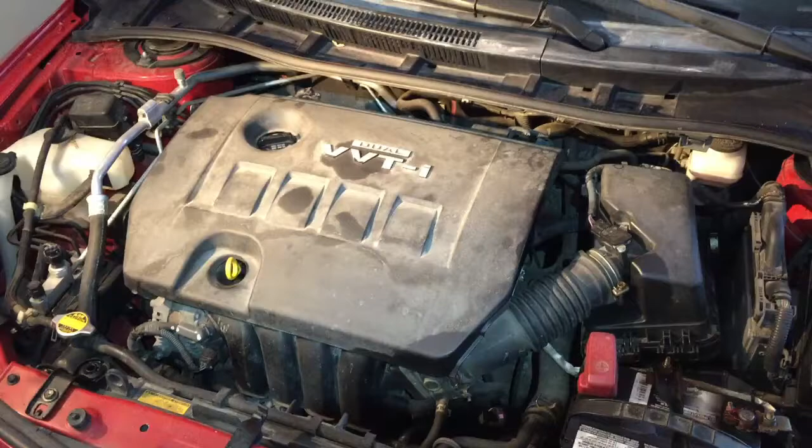Today we're going to change the spark plugs on a 2009 Toyota Corolla. It's a 2ZR-FE 1.8 liter inline 4-cylinder Toyota engine. It's dual VVTi, as you can see, and we're going to change the spark plugs on this engine.

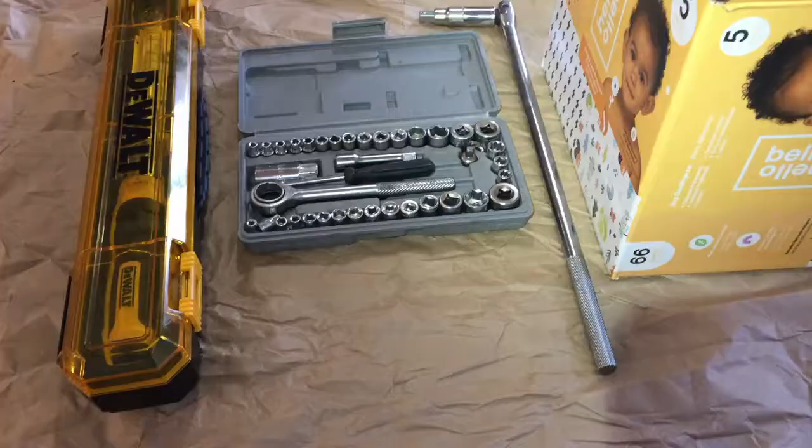First let's check what we need for our spark plug change. We will need a torque wrench if you want to torque the spark plugs to spec. Otherwise, you can just torque them until snug, and there are other methods people describe on the internet, but I prefer using a torque wrench. Then you'll need a set of sockets, and you might need a long breaker bar. If your spark plugs are stuck, then you might need this. I hope I won't. Then we have some other stuff here.

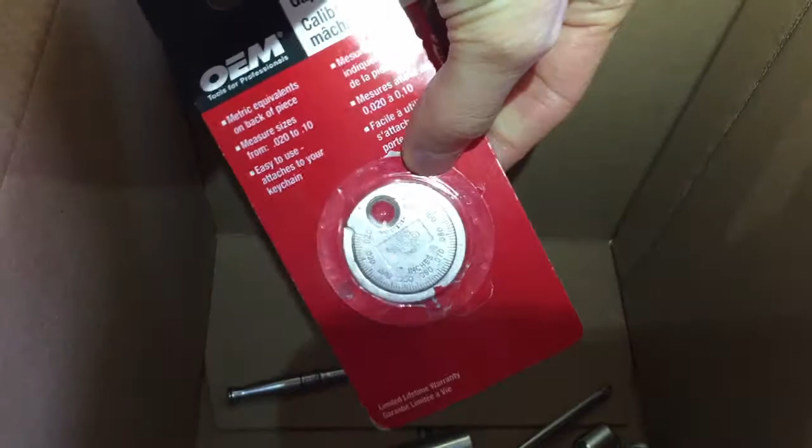Of course, our spark plugs. I bought these on Amazon, and they're not exactly the ones recommended in the manual, but we'll talk about that later. We'll need some dielectric grease, and you'll need to check the gap on your spark plugs, so you need this kind of gauge or some other kind you can find. You'll need a socket for your spark plugs and some other tools. I also like to use compressed air to blow away dirt around the spark plug, so when we put in the new spark plug, we don't bring that dirt into the cylinder or on the threads.

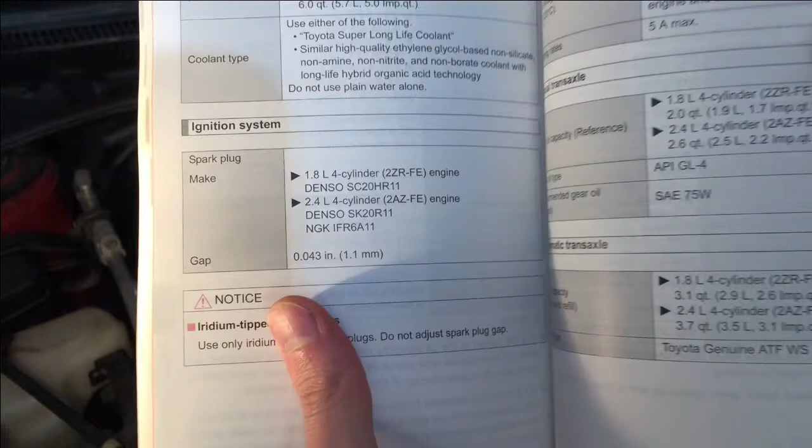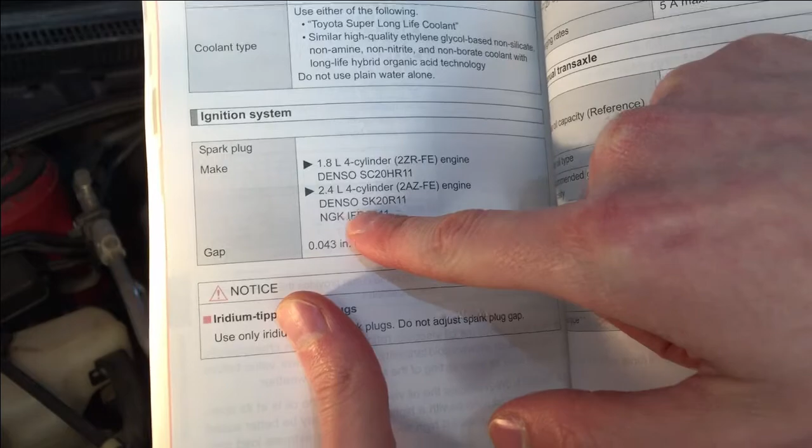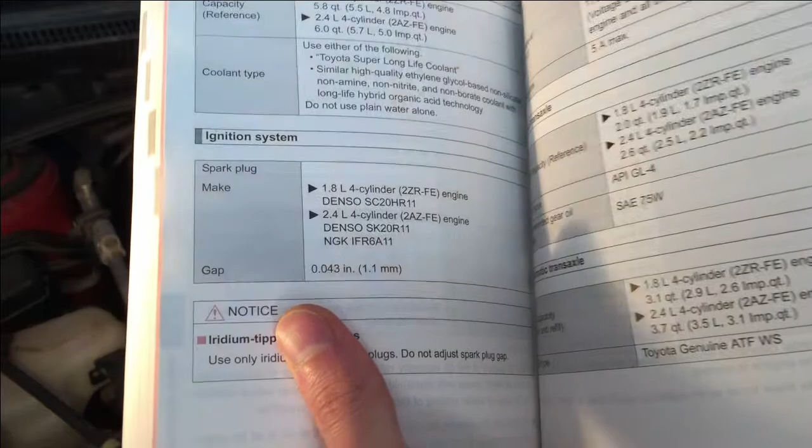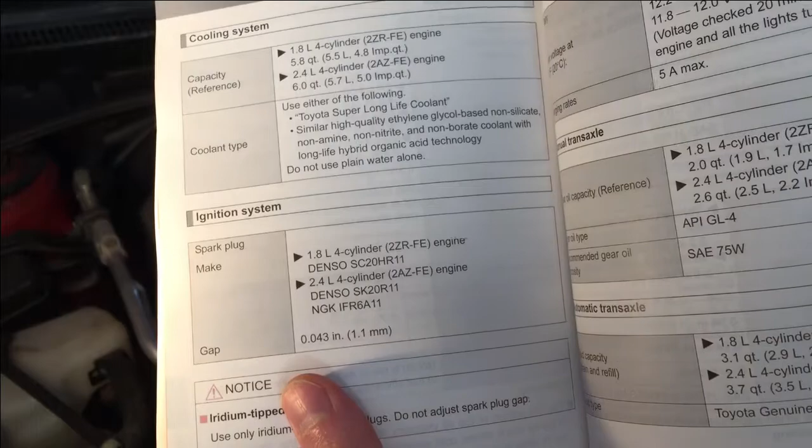Let's check what kind of spark plugs we need. For that, just open your owner's manual for the Toyota Corolla and check what kind of spark plugs you need. It says 1.8 liter 4-cylinder engine, 2ZR-FE, you need Denso with this number, and for the other engine you need Denso with this number or NGK. Of course there are a lot of aftermarket spark plugs, and I bought aftermarket ones. So you can try using the recommended Toyota ones, or you can go with aftermarket. It shouldn't really be a problem as long as the spark plugs are good quality.

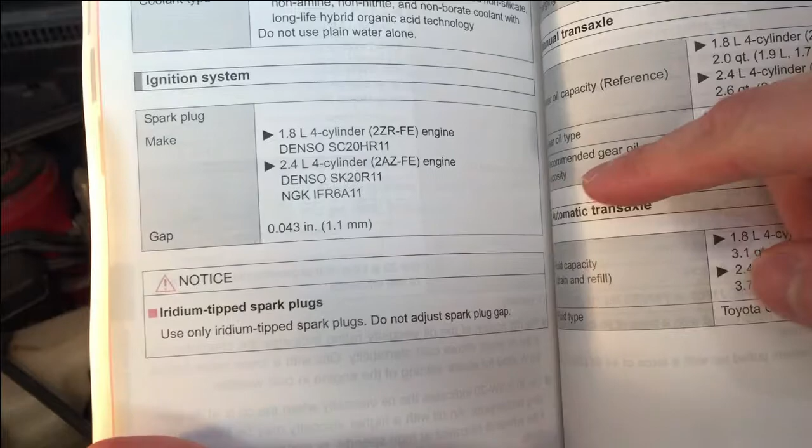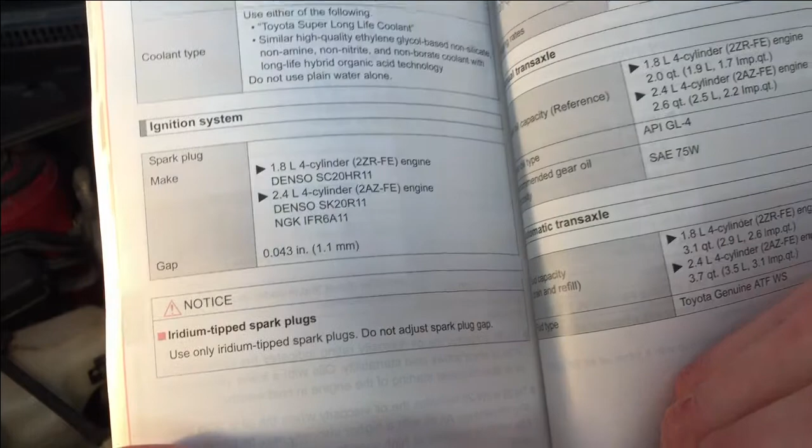Another thing you need to check in the manual is the gap. We need to make sure our gap is like this. It also says use only iridium tipped spark plugs and do not adjust spark plug gap. But I think this is a bit misleading, because sometimes from shipping you might get a slightly different gap because it was damaged, maybe hit during shipping. So you will need to adjust the spark plug gap sometimes, or at least it's a good idea to check them, and if the gap isn't correct, maybe bring them back to the shop where you got them.

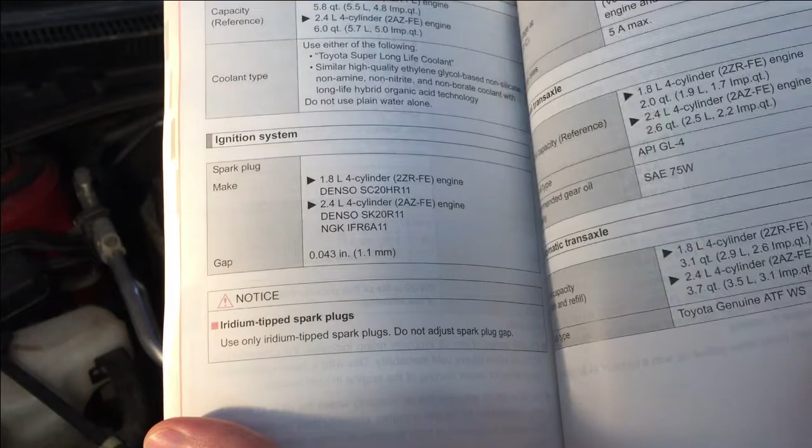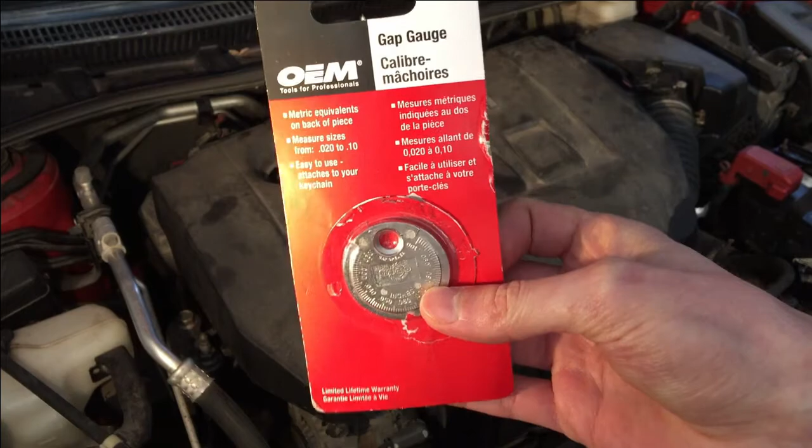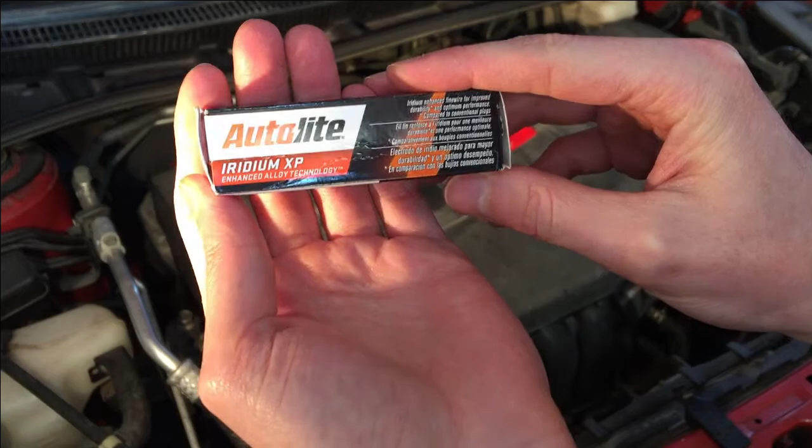As I said, I bought aftermarket spark plugs, and I'm going to check the gap using this coin style gap gauge. We know we need 1.1 millimeter on our spark plugs, and these are the Autolite Iridium XP spark plugs. So we're going to check that it's 1.1 millimeter, preferably on all of your spark plugs.

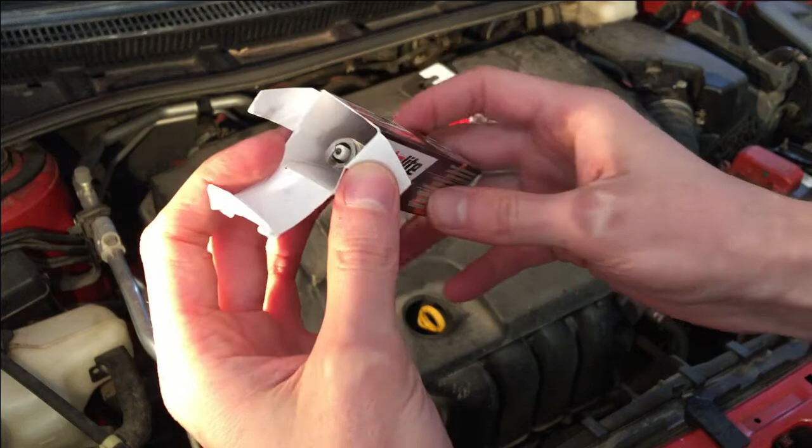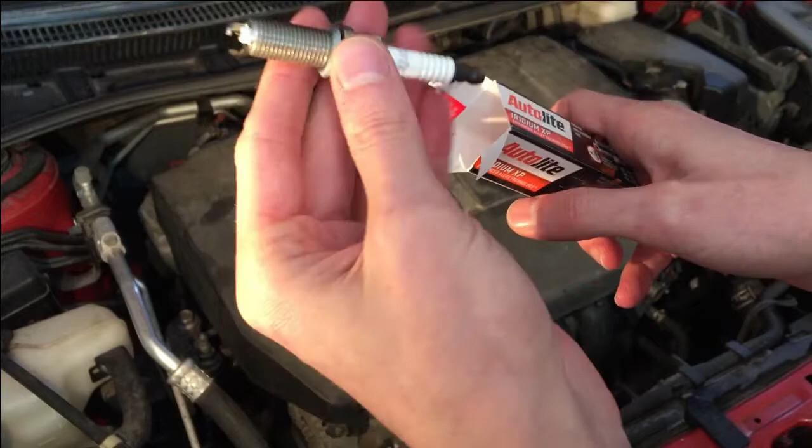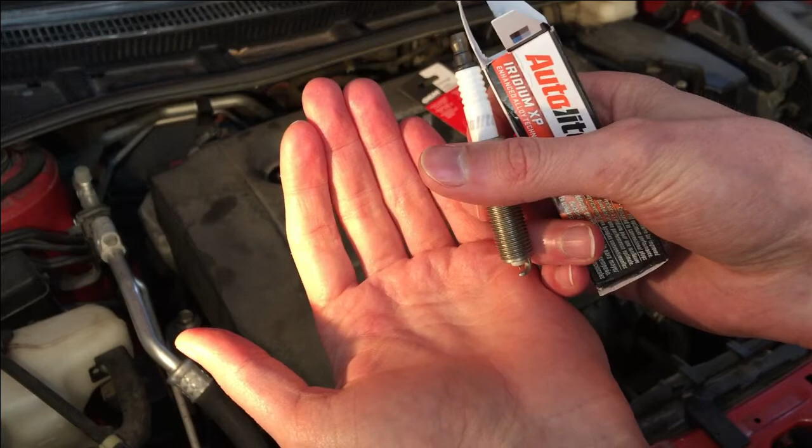So it was shipped like this, just in a box. Sometimes they would put a plastic or carton cylinder here so this part isn't damaged during shipping, but these ones came like this, and now you understand why I say they can be hit during transportation. For example, if this box fell down like this, it would hit the tip here and bend it, changing the gap. So it's a good idea to check the gap when you open them, especially if you bought them from Amazon, where somebody will bring them to your house and just throw the package.

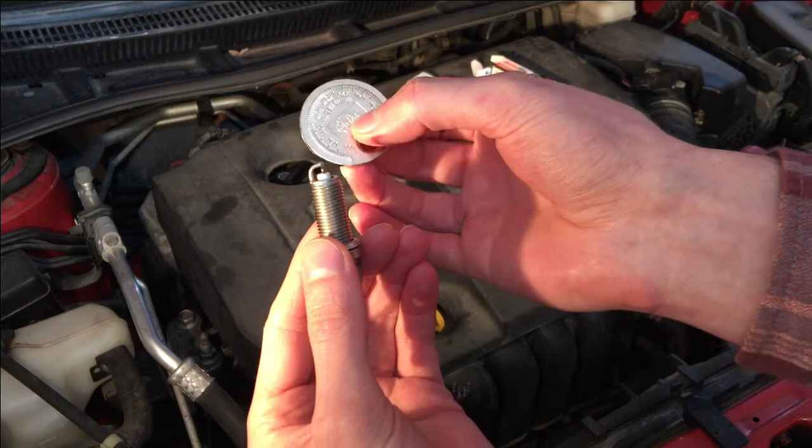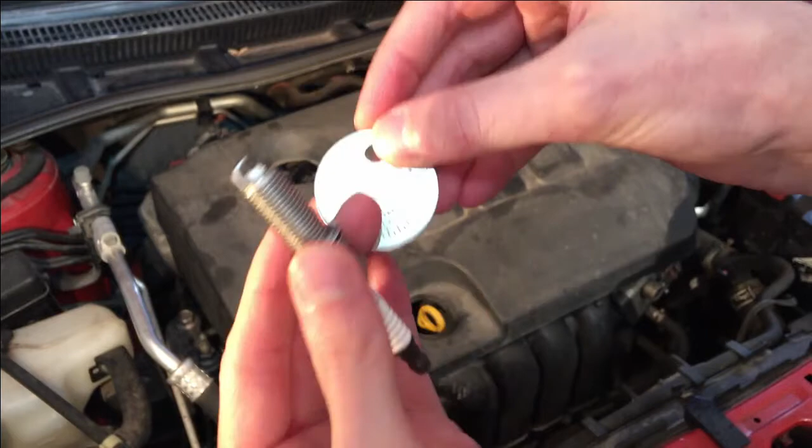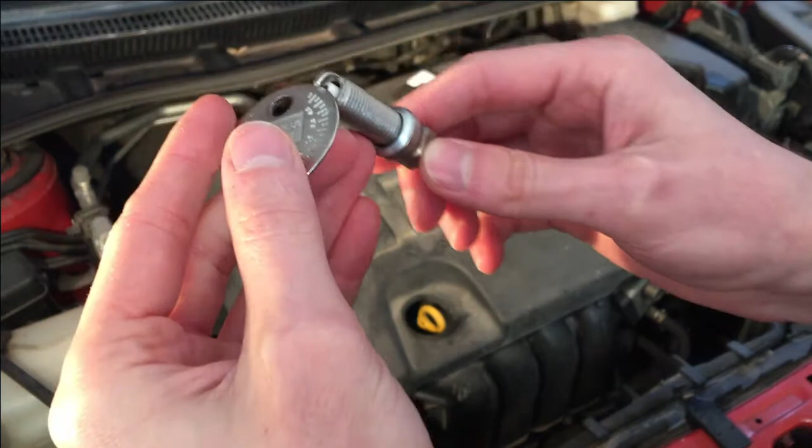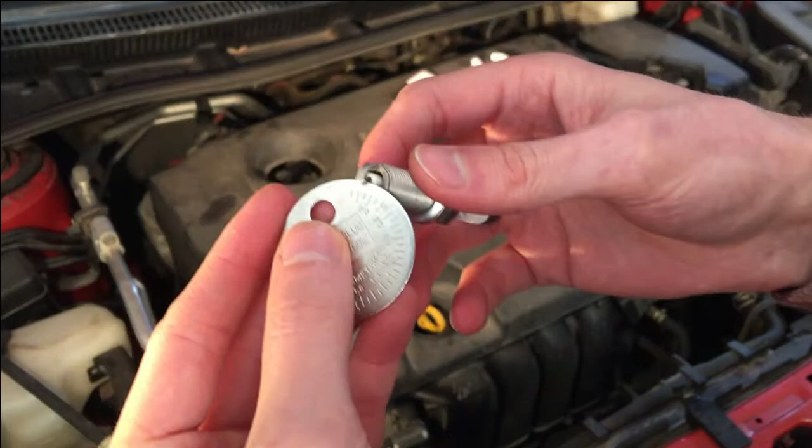So we just take the gauge. We have the spark plug and the gauge, and I'm going to be using metric. On this side we have metric. We need 1.1 millimeter, and that's here, 1.1 millimeter. How you do it: you have to be very careful not to damage the contacts on the spark plug. You can see here the spark plug has a very fine tip, and it's iridium coated, so you don't want to damage that. So you just start with the smallest, thinnest part, and slide it gently to the thicker part, and when it stops, you know your gap size. We get exactly 1.1 millimeter, that's where it stopped. This is another spark plug that I took, let's check the thickness here.

And you can see that it stops at 1.15, not 1.1. So this one has a slightly bigger gap. They don't all come exactly the same, probably from the factory or from shipping.

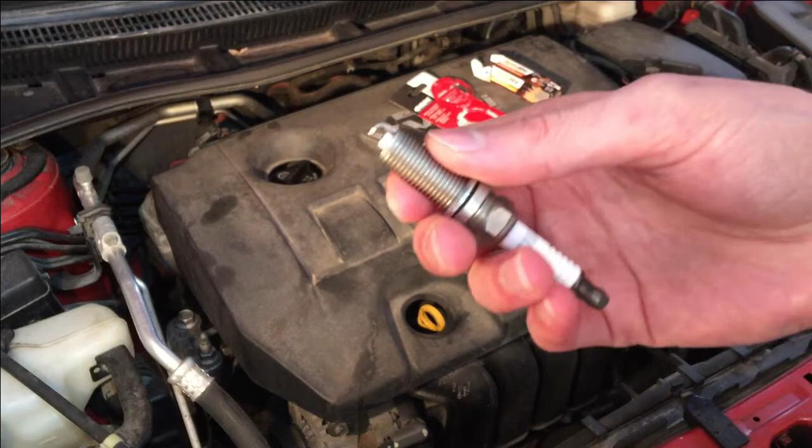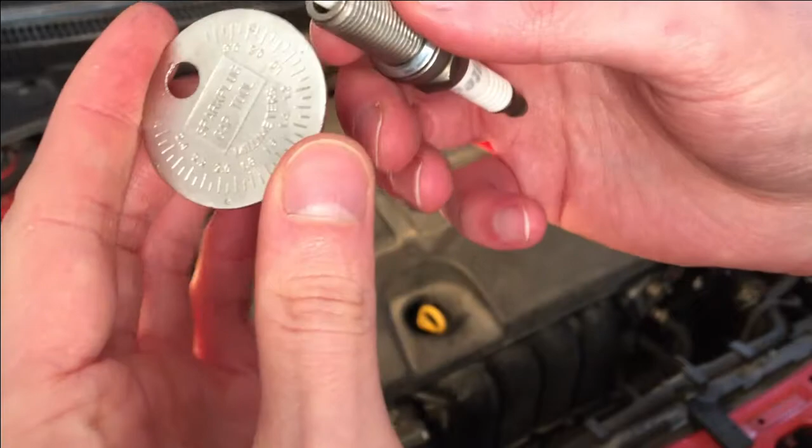So what you can do is tap it on something solid to bend this electrode inwards a little bit, then check the gap again. I need to hit it on something more solid to bend this electrode. I'm gonna do that and remeasure the gap. Now I tapped it slightly. It's easier to decrease the gap than increase it—just tap on something solid slightly and check again. So I did that, and now we have exactly 1.1.

Let's check the other plugs. I took another spark plug, and I'm checking it—I get almost 1 millimeter. I need 1.1, so this one is off. It has a gap that is too small.

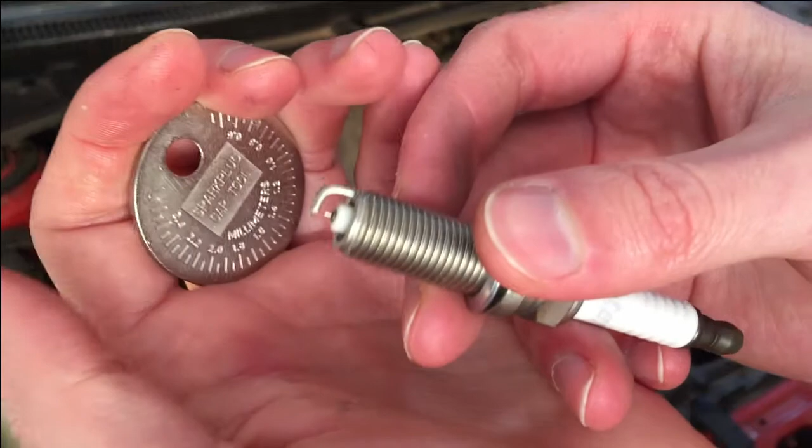This is more difficult, because in the good old days with regular spark plugs, you could do whatever you want—bend the electrodes, even file them if dirty or not the correct gap—but not with iridium. This one has a very fine tip, which is iridium coated, and it might not be all iridium, just coated. So whatever you do, if you scratch it, you'll damage the electrode.

You can also notice on the other side there's a little piece of iridium or some other metal welded on—I don't know what they're using here. So if you grab that little welded piece with your pliers, let me put some light on it, you're gonna damage it too. It's getting very tricky to re-gap them.

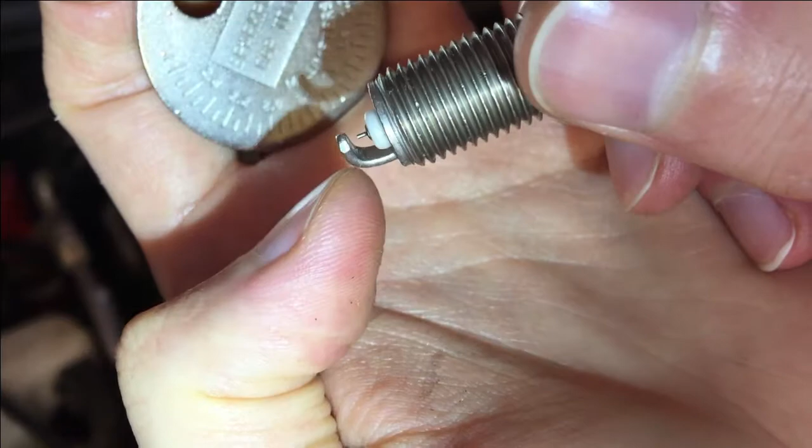Now what you can do is grab this electrode by the part that is not coated and try to bend it, without touching that little welded piece. Let's see if I can manage to increase the gap. With a very fine pair of tweezers, I grabbed it closer to the bend and tried to re-gap it, and it looks like I was successful—now when I measure it, we're very close to 1.1. I might bend it just slightly more, but we are very close. That's probably okay, but I'll try to bend it a bit more.

I checked the final fourth one, and it's okay. So you can see that 2 out of 4 were gapped okay—one had a bigger gap and one had a smaller gap. That might mean your ignition in different cylinders will be different, and that's of course not correct.

Another point I wanted to make is that you need to change these spark plugs after a while, because if the spark plug doesn't fire correctly, it will strain your ignition system. Even though your engine might run okay, with no engine light and no misfire, your ignition system will be strained and some part might fail eventually or prematurely.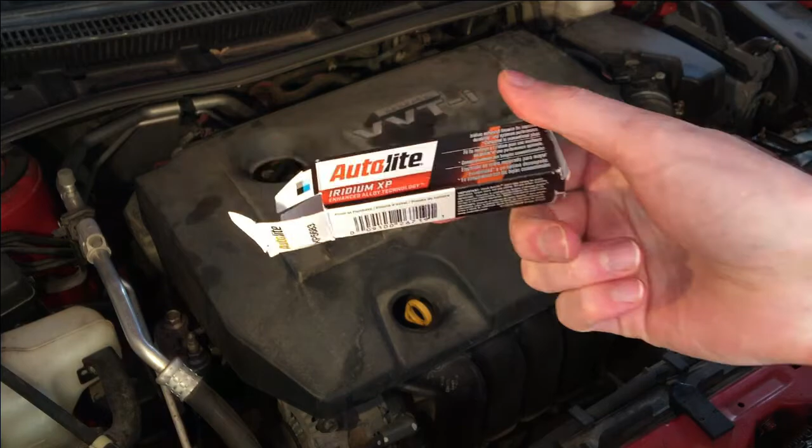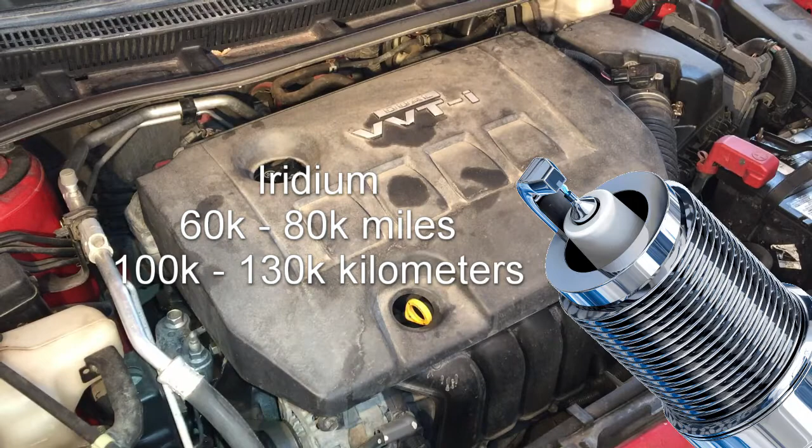So you want to always change the spark plugs by the recommended mileage on the spark plug. If I look at the box, it doesn't say anywhere how often I should replace them—just some warranty info on where they're made, but it tells me they're iridium. I know iridium spark plugs are good for about 60 to 80,000 miles, or about 100 to 130,000 kilometers. This is the most advanced spark plug you can get.

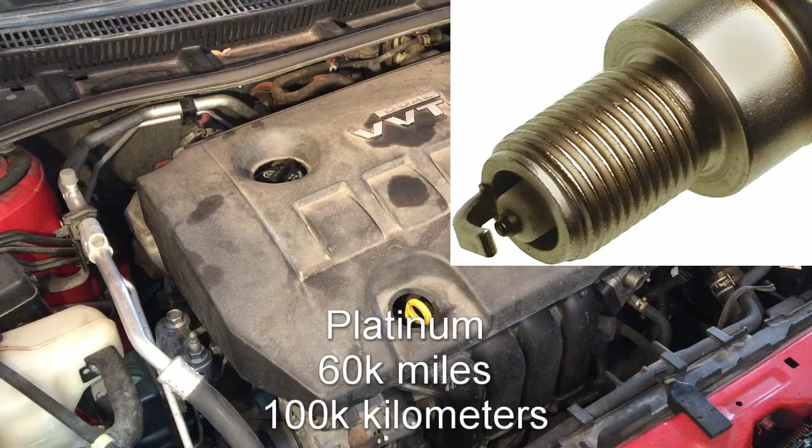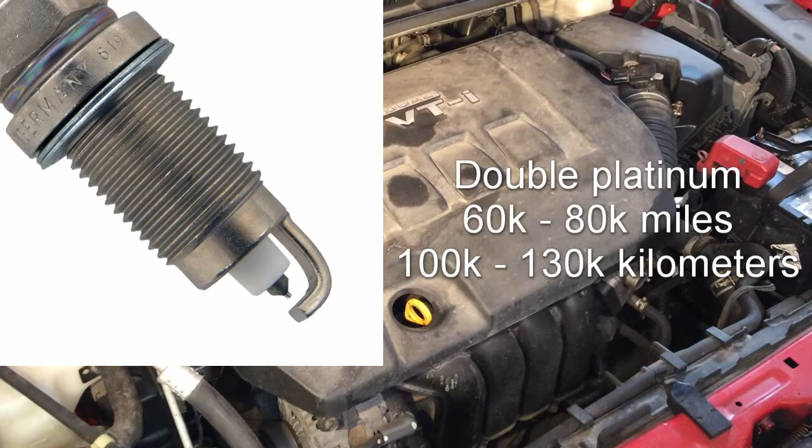The other types of spark plugs you can get are platinum, good for about 60,000 miles or 100,000 kilometers. You can also get double platinum, which is better and on par with iridium, at 60 to 80,000 miles or 100 to 130,000 kilometers. Or you can get a regular copper or nickel spark plug, which looks different—the electrode will be bigger compared to what you've seen on these. They're good for about 40,000 miles, 65,000 kilometers.

I know this car came with iridium spark plugs, and it says to use only iridium spark plugs on it. This car has about 210,000 kilometers, and iridium spark plugs last around 100 to 130,000 kilometers. So if they were changed already, it's time to change them again. But if the previous owner didn't change them, the spark plug change is long overdue. So we're gonna change them, with proper iridium spark plugs.

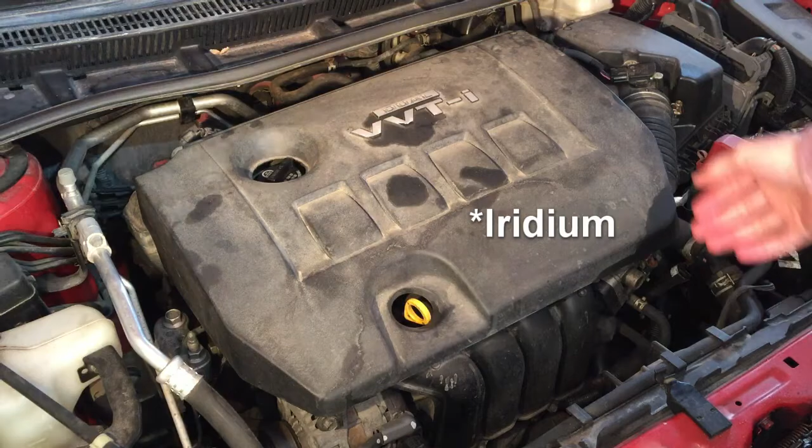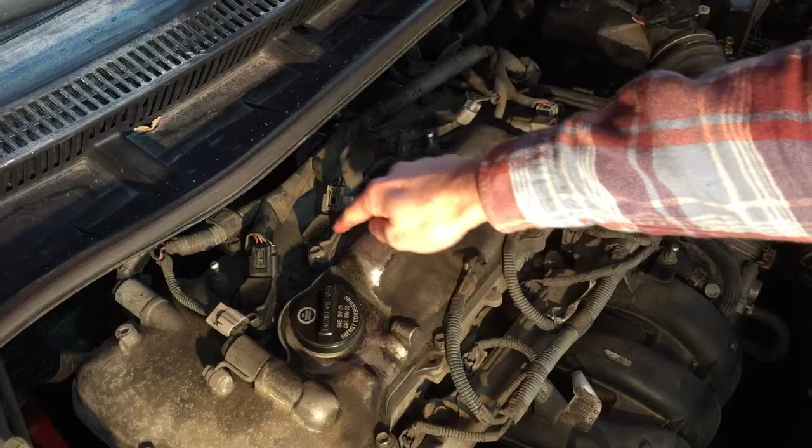So let's finally go to the spark plug change. Remove the beauty cover. Now you can see where the spark plugs are. Like this, you'll be able to see better. These are the coils on plug, and we'll need to remove them and take out the spark plugs.

First of all, we don't need to disconnect the battery for this procedure, because these are only powered when the engine is running—it's safe to disconnect them, mess with them, and take the spark plugs out. So now disconnect these connectors—it's not easy. I'll pry them a little bit with the screwdriver just to get this tab to open up more. And now it went. It's easy once you can pry the tab a little bit.

You actually don't need a lot of force to remove these connectors, but there is a tab here that needs to go up, and it's not easy to just press here to remove them. So now they're all removed.

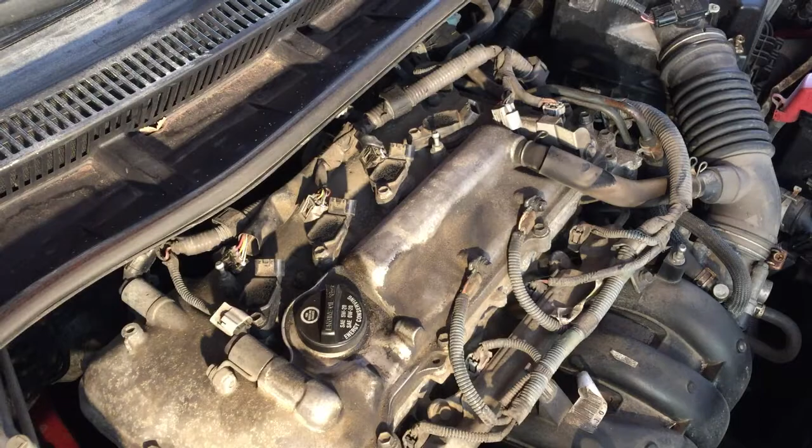We need to unscrew these bolts and get the coil on plugs out. These are 10mm bolts, so you'll need a 10mm socket.

Now we need to remove the coil on plug. Just pry it a little bit and it should come out. Yeah, if you pull hard enough, it will come out. And it doesn't look very good, to be honest.

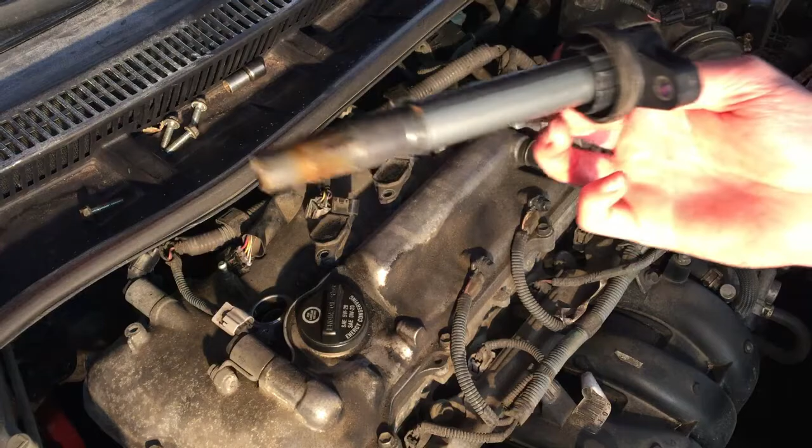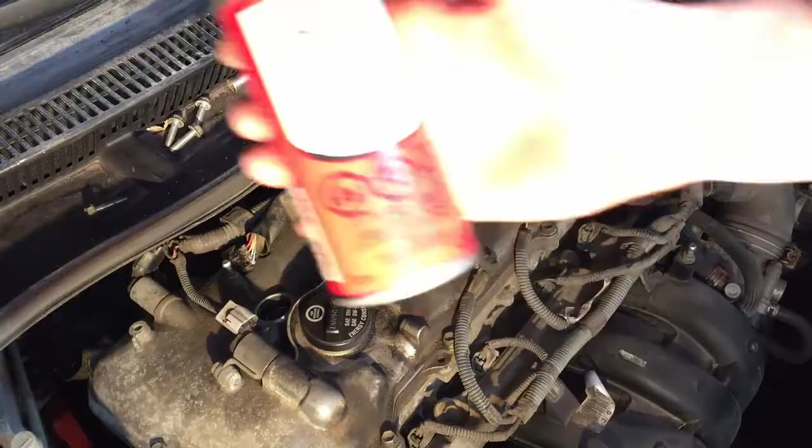Here is the coil and some corrosion. If I look inside the coil, I also see some corrosion there. So it's not ideal. I'm gonna try to clean it with the CRC electronic cleaner and see if I can get this rusty part off.

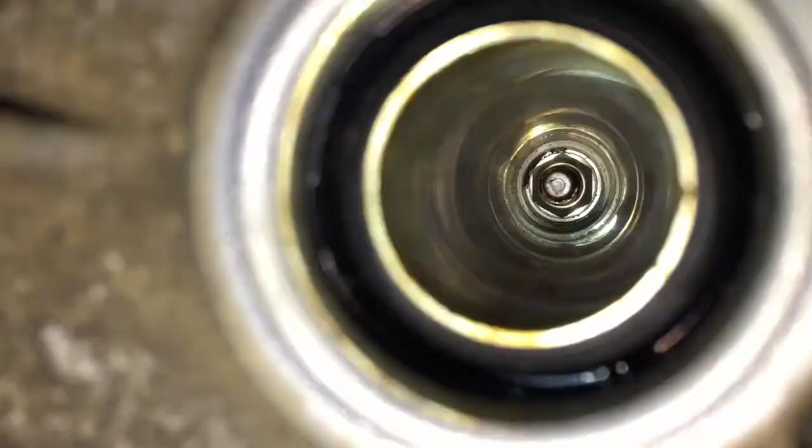If we go and check how the insides look, it doesn't look too bad. So I'm gonna blow off any dust that has gathered there. Hopefully I blew something out. And now let's take the spark plug off.

I'm gonna change only this spark plug and the rest is the same. Now the coil is removed. I tried to clean it a bit. So you can see I removed the corrosion on the rubber part.

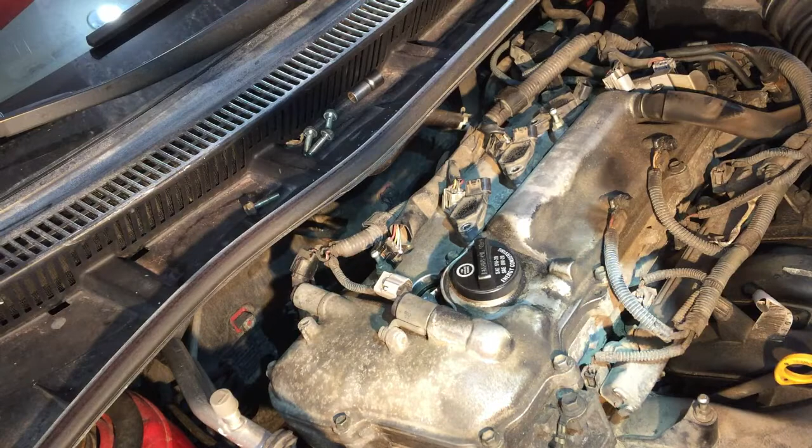But if you look inside, you can see it. If you would look inside, you'd see that I couldn't clean off that, I don't know what it is, corrosion, whatever. It's still a little bit there, but I hope it won't ruin anything. We're gonna use some dielectric grease maybe to keep that from deteriorating.

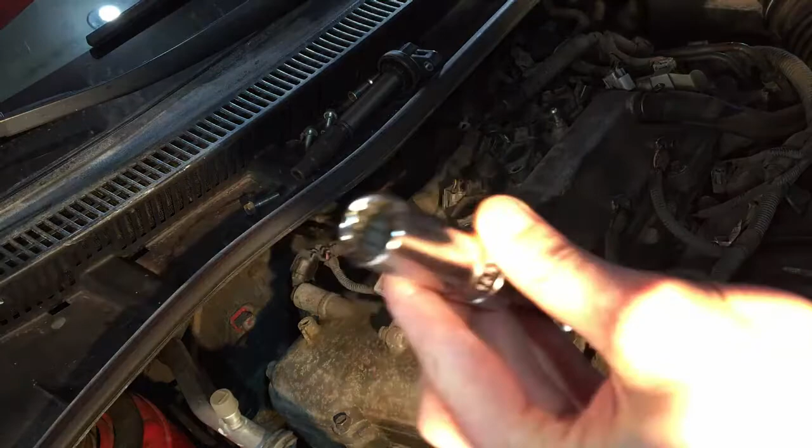So now you need a socket for your spark plug. I believe this is some kind of a magnetic socket, maybe, but it has also some rubber part inside. And when your spark plug goes in, it kind of locks in place, and it will not fall off. So you'll be able to remove the spark plugs from that hole. And then if you pull on it, it disconnects.

Let's go ahead and remove the spark plug. It's a bit tricky here with this plastic thing. You have this plastic cover, and it doesn't allow you to use a very long extension. So what you have to do is use two short extensions, measure the distance that you need to go, put this part in, and then connect the next extension and drop it in.

So take your bar, and it actually goes very easily. It goes really easy, so I'm gonna use this ratcheting thing to remove it all the way. There's a long thread there, so you go a little bit, and then you can go by hand.

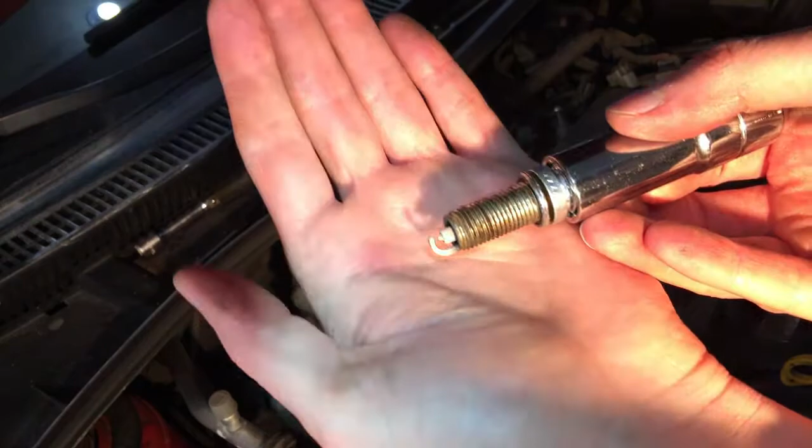And you can see that this spark plug is white. We're gonna talk about that in a minute. But first, I'm gonna just change the spark plug, and then we're gonna talk about reading the spark plugs.

It is also a good idea to compare your spark plugs. That's the one I took out, and that's the new one. Check if the threads are the same length and if your electrode length is the same. Here they're almost the same. I would say this outer electrode is a bit shorter, but that's okay. Shorter could be okay. If it's longer, if it's much longer, it's not okay because it will hit something inside the cylinder. So this looks okay, and I'm gonna put it in.

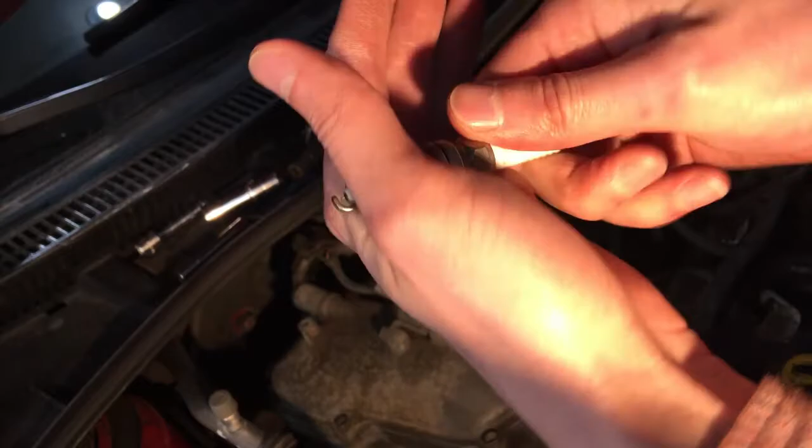One question people ask is, should I put anything on the threads? The answer is, if you have spark plugs like this that look silver, the threads don't need anything on them. They are made to go like this. If you have a yellowish spark plug, then it needs some lubrication, a copper anti-seize or nickel, you'll have to check that out or ask at your shop. But this one, if it's silver, you don't need to do anything.

Another thing I've seen people do is just drop the spark plug in. I would say never do that, because we spend some time making sure that the gaps are exactly the same in all of the spark plugs, and you don't want to ruin that by dropping it and banging it and changing the gap. Also the threads themselves can be damaged if you do that.

So never do that. Put that in your socket like this until it locks, and then slowly lower it into the cylinder. So it's nice and secure here. We can lower it inside, put another extension in, and then one more extension.

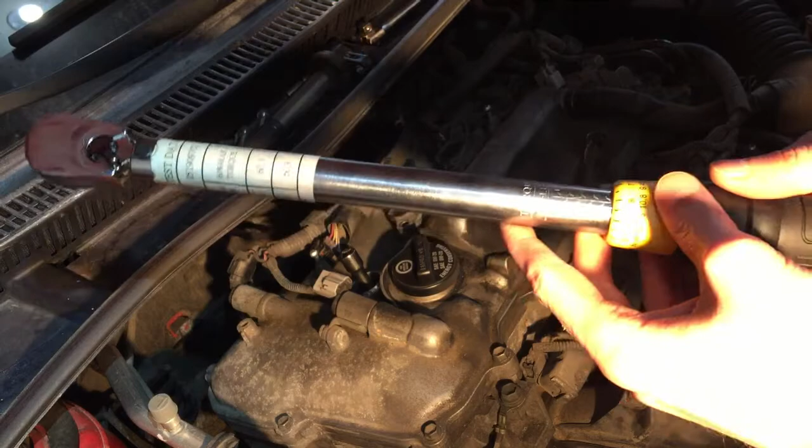Now I'm at the end of the thread, and I'm gonna use a torque wrench. For these 1.8 liter engines, you want to go with 18 foot-pounds of torque. 18 foot-pounds of torque.

Seems a bit tight. You don't want to over tighten them because they are aluminum. There, it clicked, I think it's quite tight, a bit too tight for my liking. But it did click now, so I'm gonna stop. I might use a bit lower torque next time, maybe 17 or 16, just a little bit less, because it was a bit too tight for my liking.

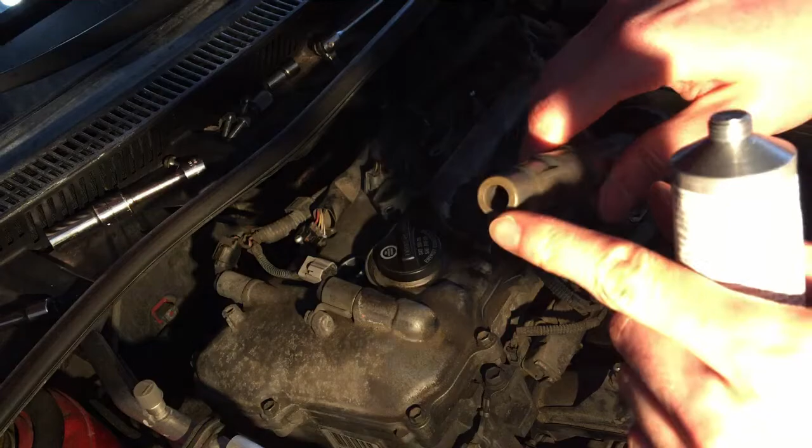Now the coil part. We're gonna use some dielectric grease to put in there, plug it in, drop it in, tighten the bolt, and connect the connector. For the dielectric grease you don't want a lot of it, but I see some corrosion, some kind of gunk in there, so I'll put a bit more in. Ideally the dielectric grease is only for the rubber part, so there's no arcing, and the part where the electrode touches doesn't really need to be greased. So I'm just gonna squeeze out a little drop in there, and that's it.

Now I'm gonna lower the coil and plug inside, like this. It went in nice and easy. So now we just need to take our bolt and tighten it back here.

Just until it's tight, you don't need to go overboard here because it's a plastic part. Now connect the connector back and you're ready. That's it, you've changed your spark plug. I'm gonna do all the other spark plugs and then we're gonna start the engine.

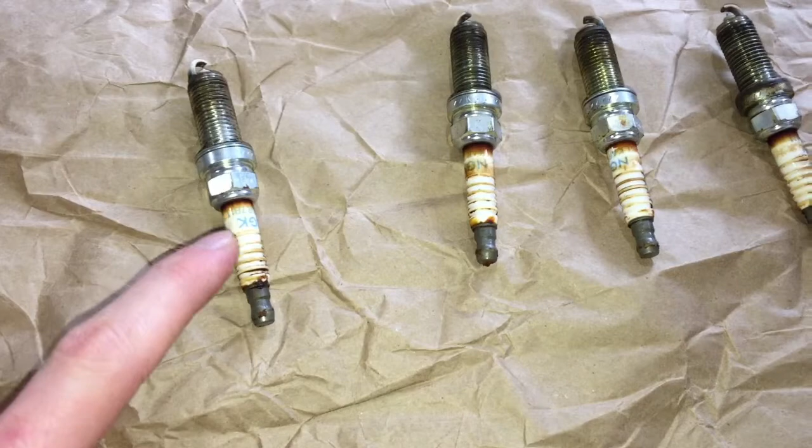Now here are the spark plugs that came out of the car, and I referred to this as corrosion, but it's not actually corrosion. I looked it up, and at least this stain here is called a Corona stain, which is somewhat normal. But we also have deposits here, caused by oil or whatever's floating around the engine, electrostatically attracted to the spark plug because there's a lot of voltage running through it. We have a lot of it here and here and here. It's not really an issue of the spark plugs themselves, where the thread or the electrodes are - this is an issue outside of the engine.

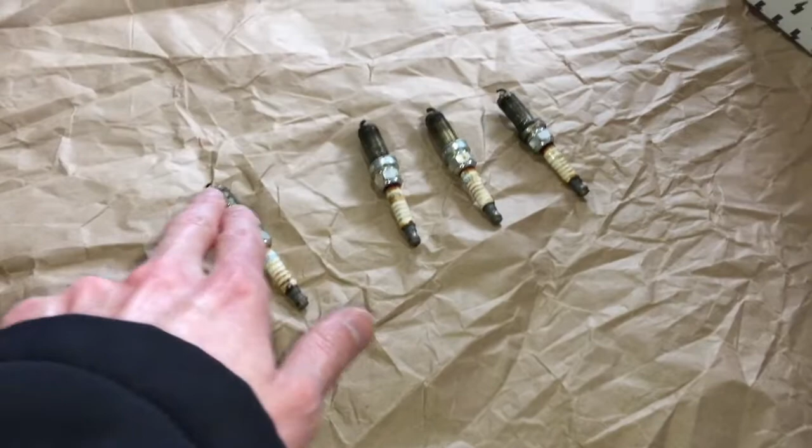In short, this is normal, but we have a lot of deposits here, and that tells me these spark plugs were probably not changed at all since the vehicle was new, because these are NGK spark plugs that most likely came with the vehicle. I'm not sure I can say exactly what year they are, but I think these are the original spark plugs because of the amount of deposits I see here. So it's good that I changed them. I'll talk in more detail about these spark plugs in another video on how to read spark plugs, so please stay tuned.

So I just started the vehicle after the spark plug change, and everything seems to be fine. It started right up. Let's take it for a spin and see if we have any problems. The vehicle is much smoother now - I used to have vibrations when stopping at traffic lights, now I don't have those, and the vehicle seems to be driving good. No check engine light or anything like this. It's a success. Thank you for watching, and I'll see you in the next one.